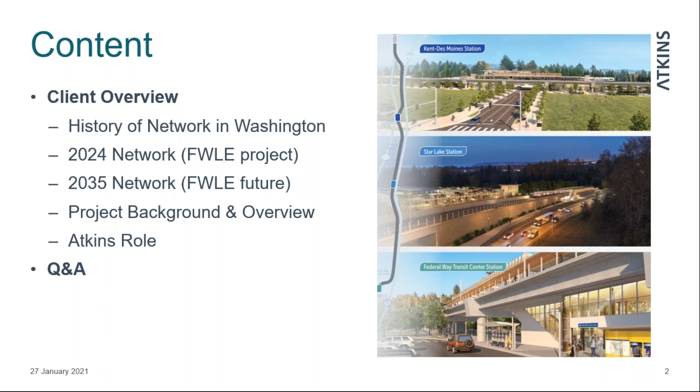In 2024, the new network is going to be updated, and in 2035 I'll take you through what the future of the network is going to be here in the Pacific Northwest. I'll run through the background and overview and what I've been involved in on the Federal Way project itself, and then it's probably best to do questions after.

So the client - I'm based in Seattle. Here's a map of the area, let's just do this.

Typical weather is exactly the same as it is in England. It rains a lot - we're next to the coast, it's all what it says. If you've ever seen Sleepless in Seattle, it's exactly like that. So if you don't like the rain, don't come to Washington.

In 1993, the local authority at Washington got together to create what they called the King County Metro system, and thought that they needed to overcome the problems of traffic and the amount of cars, because Americans love their cars and the cars are huge. So they got together and put together a plan.

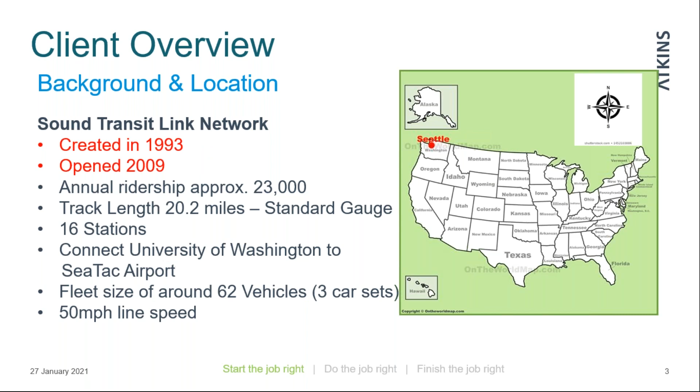It was created in 1993 by King County and Snohomish Regional Rapid Transport System to deliver a system that could run, opened in 2009. The annual ridership is typically 23,000. I'd just like to point out there are two famous things in Seattle - the Seahawks, famous for American football, and the Space Needle.

So whenever you come to Seattle, those are the two main drivers. It was for that reason they wanted to get the network system working here, so people could connect to Washington more easily without the need for traveling by car.

So they produced the new train system - about 62 fleet vehicles running, trying to remove the associated traffic impact.

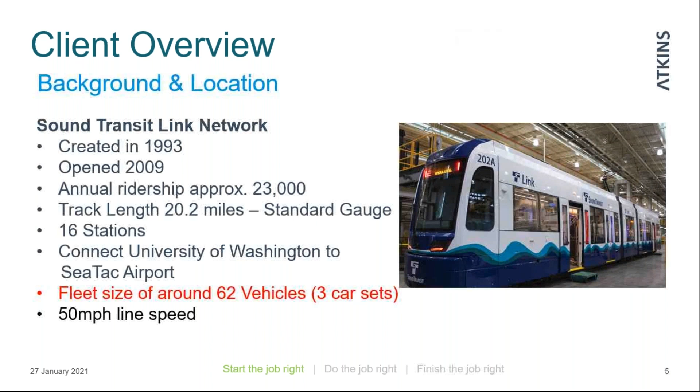The speed of the trains is 50 miles an hour, and this principally only ran from Seattle. It went north up towards the northern sector, and down south heading towards Tacoma, on the coastal line. So it was basically only a north-south ride, but it was interoperable.

It was built on the same gauge as the national railway. It operates a weekly service along the two corridors that radiate outwards from King County.

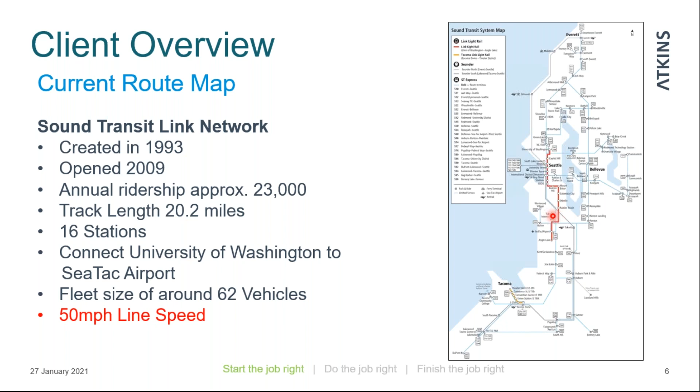With the expansion in November 2008, they realised that this wasn't enough, so the voters approved additional local funding for a new 15-year construction program of the light rail network in Washington. And in November 2016, Sound Transit approved a $54 billion plan to improve and expand the mass network in the Seattle area.

You can see the expansion, proposed expansion from what it was, going out east-west and north-south extensions. By 2024, Sound Transit will more than double its system, with about 37.7 miles of new track coming online over the next 4 years.

This track is a sort of metro system, so it's on slab track, or some of it is ballasted depending on whether it's at grade. But it's all new structures, all new stations coming online. The listed projects are currently in construction here.

We've got the Northgate Extension, which takes us up this way. We've got the Tacoma Extension, which is down to the south. Then you've got the Lynnwood Link, which takes us over to the side. So a lot going on. The one I'm particularly driving as the engineering manager is the Federal Way Extension, which is this section here, taking us down from where there's no existing track at Angle Lake through to Federal Way.

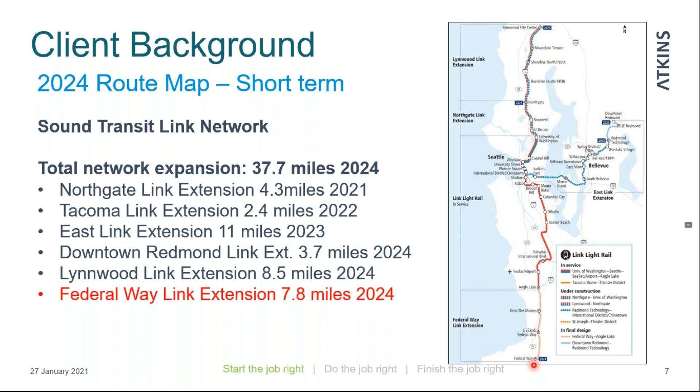COVID may have a say in that, because some of the projects are struggling with budget. Having to comply with COVID-19 rules and trying to construct with people working closely is causing additional costs, so there is a restraint. Also, the challenge is the restrictions on travel. The forecast planning ahead didn't take into account COVID-19, so there is less ridership taking place because more people are working from home. The projects up until 2024 are still being delivered, but the future expansion here may be susceptible to change - and I dare say that's the same in all parts of the world.

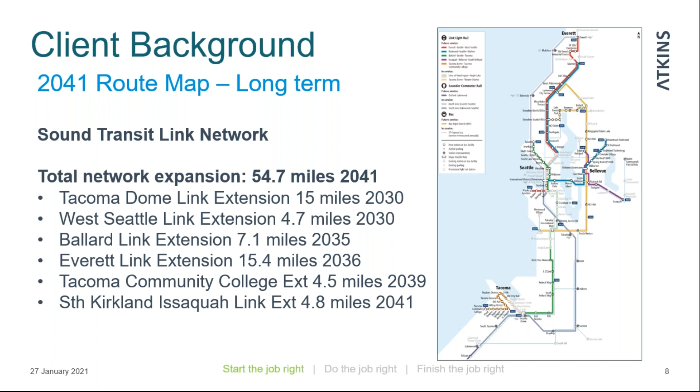A bit closer look at the project itself. We're going down from where it terminates at the moment, Angle Lake, and it goes all the way down to Federal Way - you can see it's 7.8 miles long, with 3 main elevated stations throughout. It's the largest design build project that Sound Transit have produced, and the project was approved back in November 2016.

It's an extension of the light rail that will take us down and connect Federal Way as a future hub, and then up into Seattle. It's a turnkey project, so it's a design build - the first time they've delivered a design build contract. The contract sum was about 1.3 billion. What they want to do is put all the onus back onto a single contractor, and we, as Atkins, are helping them manage that interface between the contractor and the client - informing the client, enabling them to create the appropriate specifications, and enabling the contract to be delivered, managing the interface and the budget for the client.

We proceeded back in March 2020, and it's due to be completed mid 2024. We are on track at the moment, even though it's been a very challenging time last year, which continues this year. But let's keep it on track, hopefully.

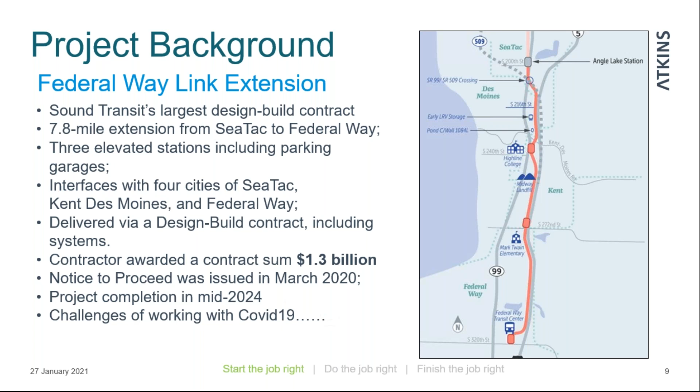So the Atkins role on the joint venture - we are with MOTS, so Atkins and MOTS are put together. It's a kind of oversight role that I'm involved in, as the engineering manager, as part of the team. It's acting as a client and making sure the design, construction and quality assurance is completed so that they can deliver and operate the railway safely when we hand it back. We have local subcontractors, but the principal contractor on this job is Kiewit, who's fully familiar with the design build contract, and we're working well with them - we've got a good relationship building.

So between MOTS, SNC Lavalin and Sound Transit, we're helping to deliver the design build. Phase 1 of the project was the award, which was back in 2019, and now we're into phase 2, which is the design and construction elements. Just to give you a flavour of the people on the team and the way it's built...

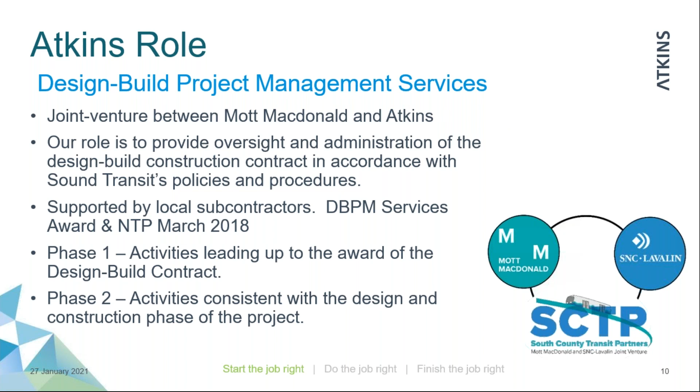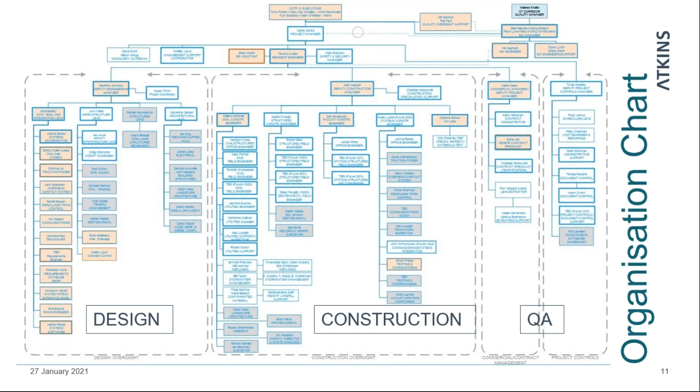I was going to show you a video, but I think I was a bit concerned when we did a trial that the broadband may not survive. So I've taken some snapshots of the oversight, the aerial view of the route.

There are some complications, but it starts in the north, Angle Lake, which exists currently, and we're connecting into Angle Lake, doing an elevated construction that has to take into account the future proposed 509 main link road. So we're integrating that, which is going to be built after Angle Lake is built and after the main construction through route of the 7.8 miles is built. So it has to take due cognizance of this proposed road.

So we're dealing with the agency WSDOT, Washington State Department, and we have many third parties that we have to interface with to make sure that we're not disrupting, and it's all working as a system, transport system.

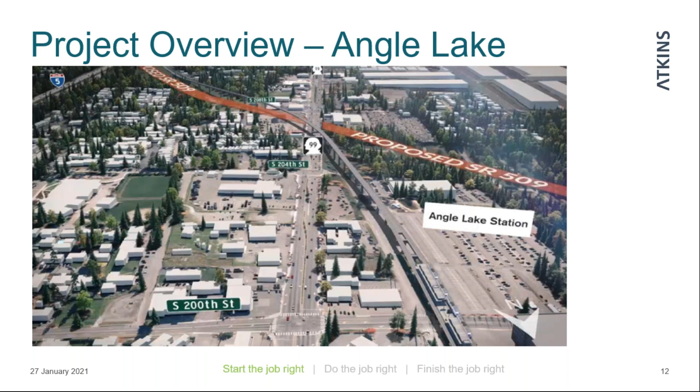I'll take you through a few slides which will run us through the overview of the project. As we come further south of the 509, you'll see that the route alignment takes a parallel running with the adjacent I5 motorway, so that's equivalent to the M4. There are various structures we have to build, and we've got the underbridge here, 216th, which is kind of 200-foot long, so it could be deemed a tunnel. I've got some more detail on that.

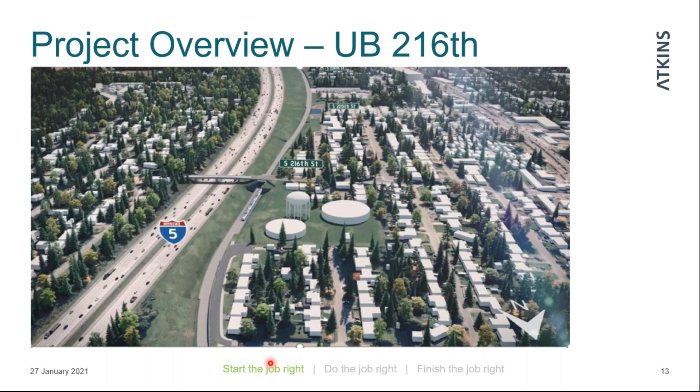That then runs parallel as we go down to the first station, and we come down to what is Kent Des Moines station. This is where it's not only a route alignment project, it's also a redevelopment project, redeveloping the area all around the stations where they considered it to be run down, taking it as a regeneration project. So that's why we've got not only the highway authorities involved, but we've also got what we call the AHJs, authorities having jurisdiction, and Kent Des Moines is one.

That's like probably boroughs, it's a Swindon borough. And then we go through. So there are many different types of interfaces that we have to keep through.

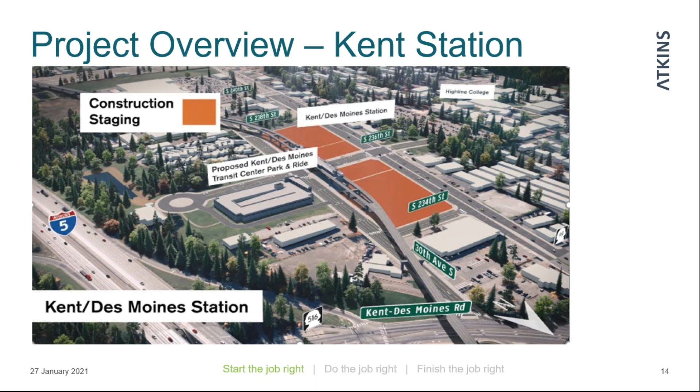On a more technical level, we've got challenges where we're running further down the alignment, following the I5 corridor. We have Midway Landfill, which is a historic landfill site, so it's got leachates, and we do not want to break the liner through there. So we've had a lot of interface on how to design through there safely and make a cutting.

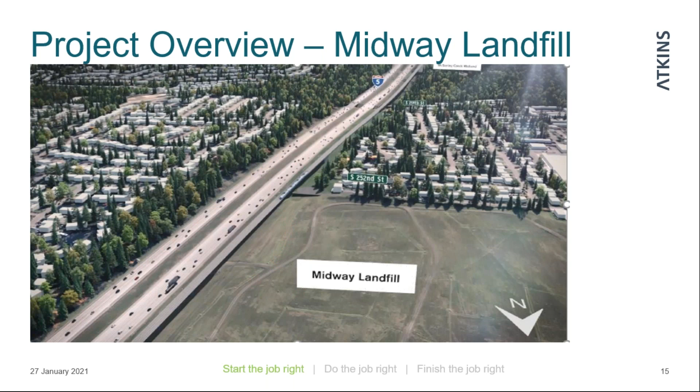So that we don't have future problems from an environmental aspect. Also in the northwest here, in Seattle area, we've got a lot of wetlands. As I mentioned earlier, it rains a lot here, and it's quite low lying down by the coast, so we have a lot of natural wetlands that are permanently saturated. We have to build structures to accommodate that sort of saturated land and get over the geotechnical problems.

So that we don't have a potential problem with settlement. Additional to that, we've also got the challenges of liquefaction of the subsoil, because this area is susceptible to earthquakes, and everything that we build has to be constructed to earthquake guidelines for this particular area. So that's another consideration into the design.

As we move further south, we get to Star Lake Station. This is a new station and a new area that's being redeveloped with car parking. So every station hub is going to have a large car park. They call it a garage over here, but it's a car park in principle.

And the route alignments into it from the road have to be designed, and the landscaping has to be completed to the northwest architectural requirements, and therefore everyone has a say. So it's making it quite slow progress in design, but we want to get everyone approved, because we can't start construction unless we have WSDOT, the authorities, the client, and the contractor all aligned with the agreement.

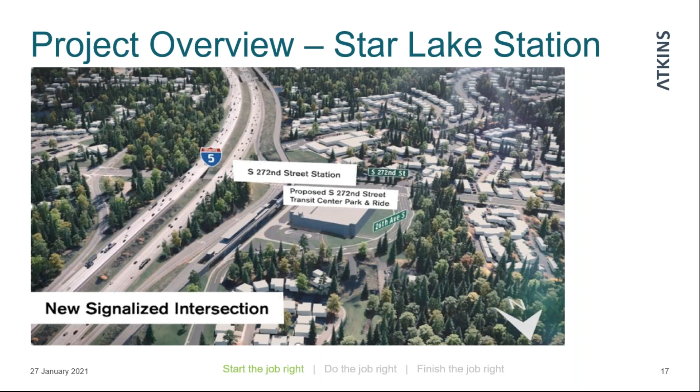Moving further south then to the end of the alignment, about 8 miles further down, we're redeveloping the whole area of Federal Way. A lot of that land has been purchased quite a few years out, and it's coming in here. You'll see the alignment comes around to Federal Way. It's on an elevated structure, and it finishes at the Federal Way terminal.

This then becomes the starting point for the future extension. So we've had to build that alignment to cater for 2 speeds. It comes in at 5 miles an hour to stopping, and then it's going to be a through route connecting further southwest to Tacoma, where it will come through at 50 miles an hour. The idea was to design it such that we could have 0 elevation, and then the plinths could be shimmed so that they could be taken out, and the permanent elevation would be the through route.

That's some of the challenges we were coming across. But that's an overview of the route, to give you a heads up. Looking a bit more detail then as we go through the disciplines.

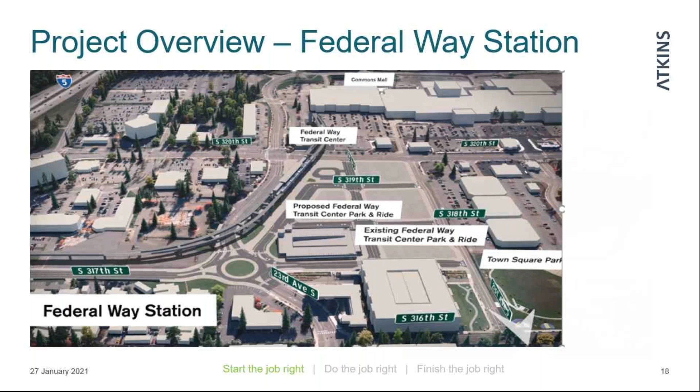In terms of track, and I suppose this is what you guys are probably more associated with, the majority of it is going to be on elevated track with concrete plinths and appropriate barriers. Standard spacing on these base plates will be 760mm, which is typical for a Pandrol or E-clip style fastening. We're not over-egging the spacing arrangement.

The at-grade track would be ballasted on what they call concrete ties here, but they're very similar to the concrete sleepers you have in the UK and Europe. Gauge is 1435mm. The rail inclination is slightly different, it's 1 in 40. The rail type profile is 115RE, slightly bigger than 113A or 113lb rail. It uses E-clips, but it can be interchangeable with Pandrols. In essence, it's very similar to European track on this metro system.

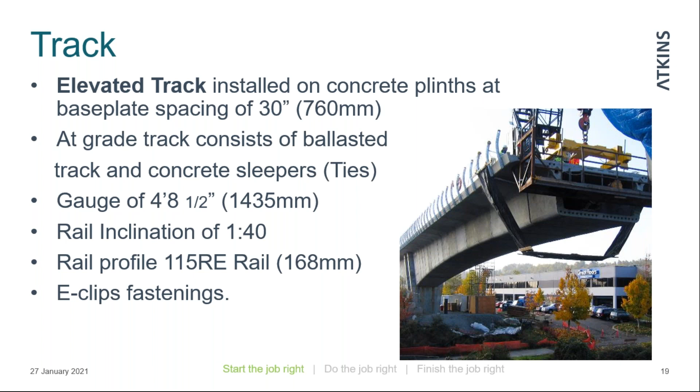Now, I mentioned earlier some of the problems we were having, with the landfill site and the interface with the I-5 on the left. If you look here, I've got a cross section where we've got the I-5 motorway running down this side. So the drainage is being taken away here from the I-5, but also we've got the landfill site. I've blown up this section, and you can see we've got the landfill all through here, so we're building a retaining structure to hold that back, and then a liner to stop any leaching.

We need to stop anything bad from the landfill site getting into the watercourse, and design it so we can take the water away from there and drain it away. So there's a large drainage system package here really for how do we deal with one problem on the right hand side, where we've got no way to get the water away to the motorway. It's a combination of solutions and then hydraulic modelling to prove that the design would work and allow no future ponding of water in this area.

So that's been quite a challenge, and also the treatment underneath. If the track alignment is here, we've got variable sub-base materials, so it's about treating that to make sure we had the appropriate bearing capacity for the actual land itself.

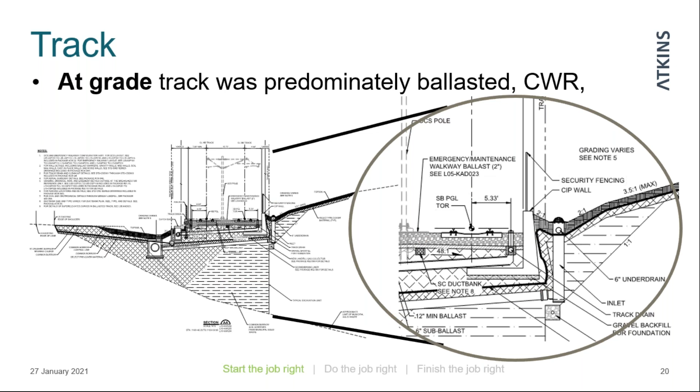The typical track only has 12 S&C units, so there's not a lot of crossing of the tracks. It's basically a metro system for getting from one station to another, stopping at all stations. The only areas where you'll have crossovers are to allow for operational movements, maybe maintenance at night or coming into sidings, so there are 12 S&C units added to this.

Typical design speed, as I said, was 50 mile an hour through route, and turnouts at 20 mile an hour into sidings. Everything's electric motor points, and it's fully welded track, CWR.

So track is one element of it, which seems to be everything standard componentry. If you're pulling it in new, you put it in on the straights, you won't put it in on curves or high canted track, you won't have tight radiuses. So we've had the freedom to produce, or review, the alignment to make sure that it's maintainable and they're not having future problems.

We've also integrated into it a rail grinding strategy that needs to be delivered, or rail polishing, so that the contractor has to meet after he's installed it to make sure that we keep the profile of the rail, both the switches and crossings and the plain line, in good order.

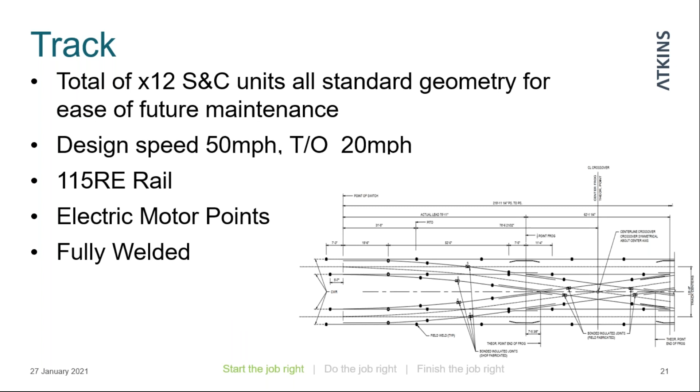Now, I mentioned earlier we had the challenges with the civils and structures, which was the tunnel alignment and the future road that we had to take into account. It was the seismic problem where they put an interlocking sort of box through the underbridge there first, but couldn't prove that under seismic conditions it wouldn't disengage.

And so what they've come up with is a cast in place unit. Well, it's cast, and then it will be walked in or wheeled into place, so it's a complete unit. It's important that the geotechnical information they had was accurate enough so that this was a very rigid structure, that it wouldn't crack under installation.

So the biggest problem was proving that we had the rigidity in the box in its weakest state when it's being installed, and that settlement afterwards would be comparable. I think we're trying to put it in within about 50mm tolerance over the whole length, and if we're outside of that tolerance, then we could have trouble with the box itself cracking.

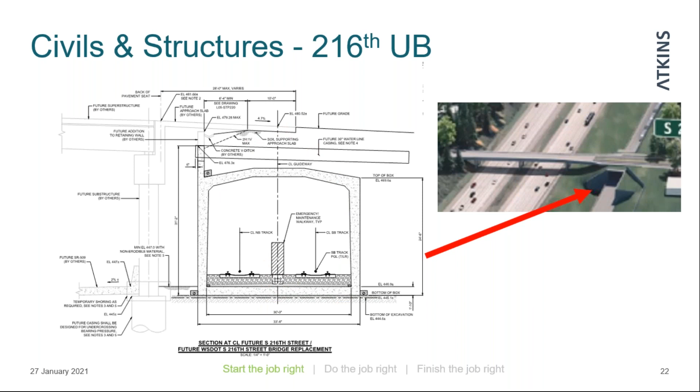Similarly, we've got the typical layout element of the columns. There are thousands of these columns going in along the route, all being constructed on site, predominantly through the elevated structure.

There's a real concern over the thermal performance and monitoring. So there's a thermal control plan in place, and you can see the sensors. When they're pouring and casting the concrete, they monitor the thermal temperature internally and externally, because high winds and high rain can affect the rapid cooling of the concrete. We have to make sure the curing plan doesn't give a thermal shock to the concrete, which would make the column weak, fractured and obsolete.

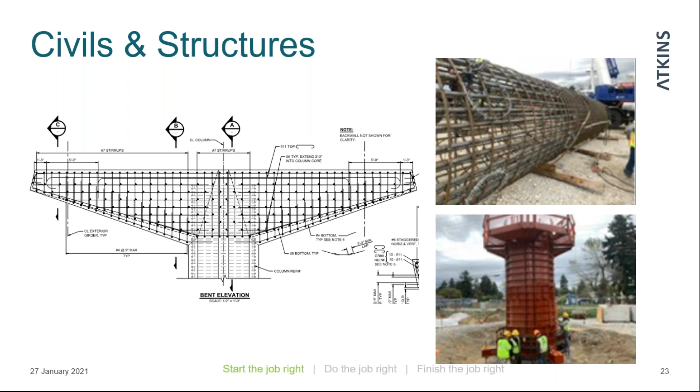But we've got it down to a rolling program, like a factory line: piling, getting the settlement right, getting the shuttering position correct. In parallel they get the casing corrected, using reusable shutters. Then they pour the concrete, cure it, and move on. This rolling program keeps going until they can remove the shuttering after the dedicated time allocated in the thermal plan, giving confidence that the concrete is safe and sound.

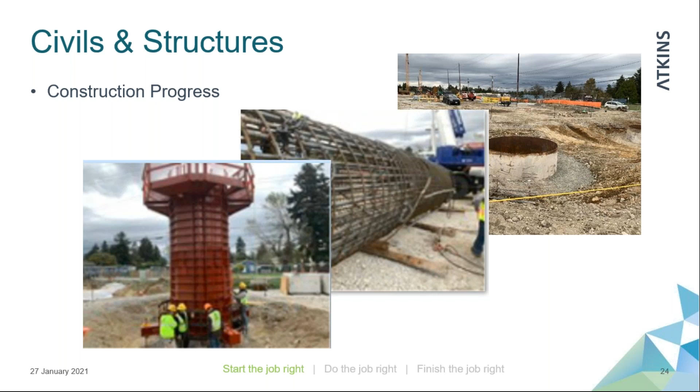With regards to civils and structures, I can give you a quick flash update. The design is about 85% complete. In terms of construction, the design from the civils is 85% complete. Some of the structures in the stations and garages are further down the line, but they are progressing.

We work under a similar GRIP process to what you used to have in the UK. I don't know with Brexit whether that process is changing, but we work off a 30% design, a 60% design, then what we call a 90% design, and then the IFC, or 100%. So there's a staged approach the designer has to go through, and as the design matures it gets more complex and detailed until you reach approved-for-construction drawings.

In terms of the challenges, on the base contract we're about 25% complete. Demolition, a lot of the felling of trees has been done, clearing and grubbing. Big challenges on relocation, working with Puget Sound Energy on where they think their utilities are, and when you actually do trial holes there are a few things catching us out. But I think on every project I've worked on, utilities are a challenge.

There's the excavation embankments - this is the route alignment going in next to the I-5, where we're monitoring embankment stability while they're working, and also the times of day they can actually work, since heavy rainfall means they can't be excavating. The two complexities, as I mentioned, are the Midway landfill and liquefaction. We're constantly keeping an eye on these two things to make sure we don't have a safety hazard on site, and we have a full-time team reviewing quality checks for safety as part of the contract requirement.

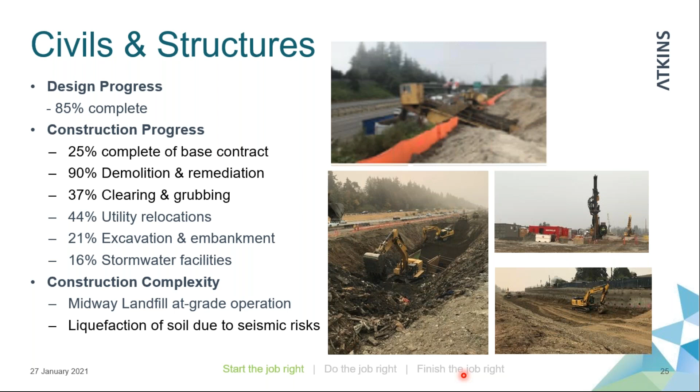Moving on to stations and garages, we've got 3 main stations - Kent Des Moines, Star Lake, and Federal Way - integrated over these 8 miles. So it's only every 2 miles or so that you'll have a station, because it's principally for people to use as a quick commuter route in and out of Seattle.

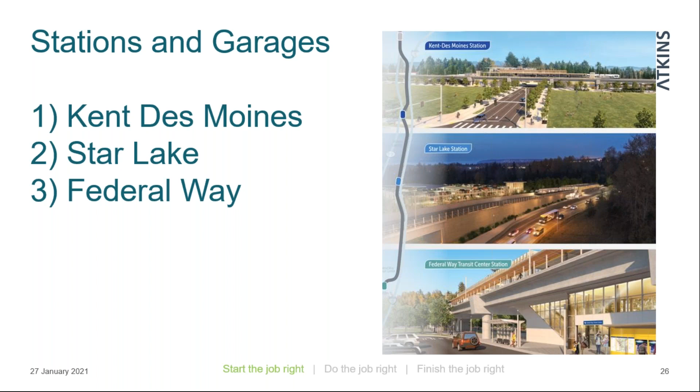There's a few challenges on that station - I think it was Star Lake, yes, Star Lake. We had a derailment risk. What happened was they put an elevator too close to the edge of the platform, and the ruling in the state of Washington is: if this train derails, what are the consequences? It was less than 3 feet, a very narrow entrance at the top end. We reviewed potentially going for a deviation to the contract by checking the rails and stopping the derailment, but the consequence of hitting it would take down the building, since it was a glass facade. So we had to widen out the structure and get allowance so that the designer had the clearances needed for Star Lake.

So there are a few challenges with certain stations. I'll just give you an overview.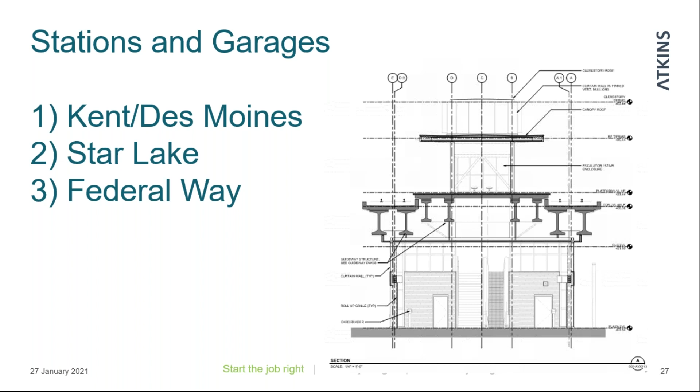Kent Des Moines, we've got Kent Des Moines station here. This is where the new parking's going and the route alignment comes through, but there's a lot of emphasis being placed by the authorities having jurisdiction that the landscaping is done to their specification. It also allows for about 500 car spaces here, and it's promoting easy access from the train station to the cars or to the open landscapes.

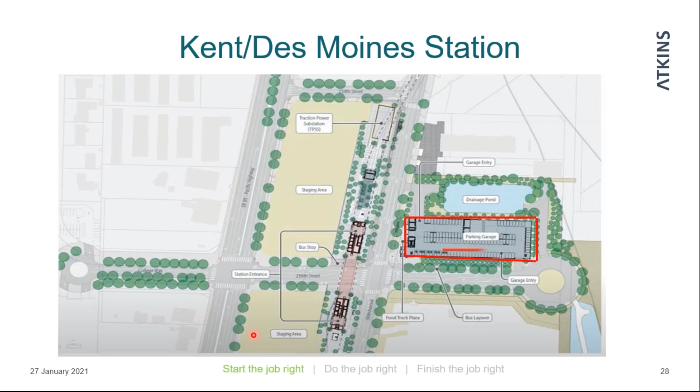And we're having two large plaza areas where it's open art. There's going to be open art here, and it's going to look nice. I'll show you a picture next of what it's visually going to look like. So this is the artist's impression showing the station, the roadway through there, and how they're going to landscape it. I think it's going to look quite smart when it's finished.

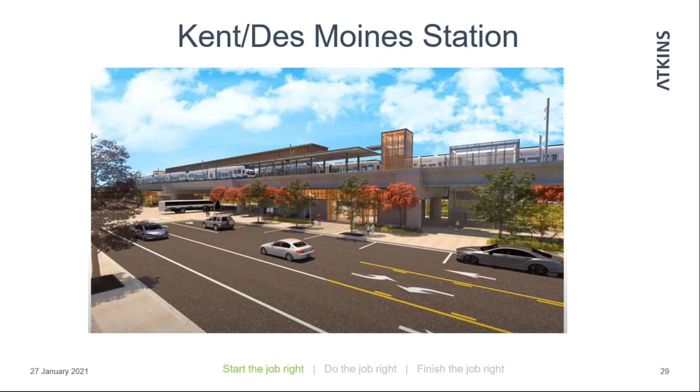Similarly, we've got the Star Lake station. That again is a similar layout where you've got the station line coming in, the large car parking area, and the planting with the lake beside it. This also has 500 car spaces, 3 new landscaping areas, and 2 plaza areas for seating and public use. So it's a similar footprint.

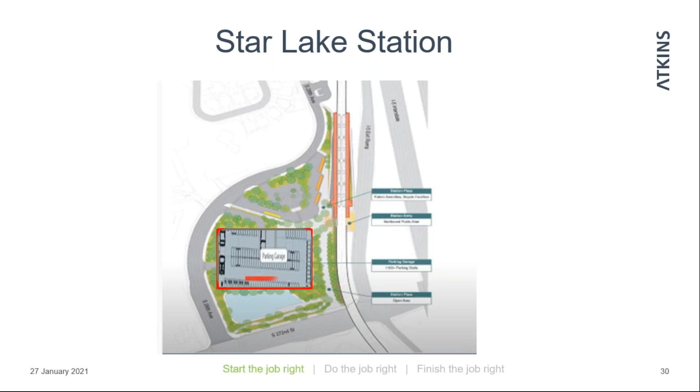And this is an artist's impression of what it would look like. So as you're walking from the bus through to get your tickets, and then the train station on top with the glass facade. Anywhere we've got a station or garage, we have to go through the Washington Energy Code, and every structure has to be approved to their energy code. So we don't want buildings that have potentially got cold spots. They're modeling this in a 3D environment to prove that they will work in the Washington state environment.

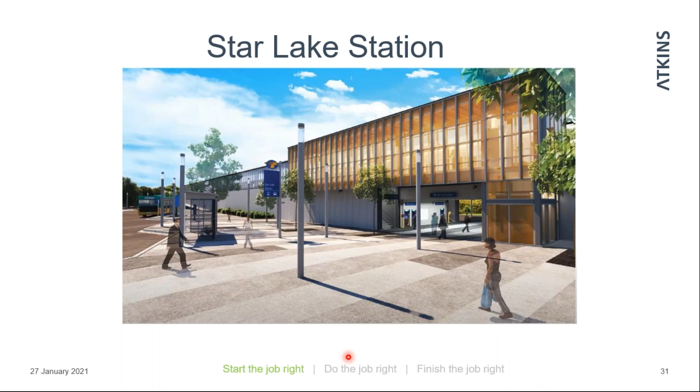The challenging one was the terminus station at Federal Way. This is still draft - we've nearly got a solution, but this is a complete redevelopment of the whole area, not just the station. There's the station as it comes in, an extension of the existing garage or parking area, and the road structure around here is being remodeled as well as part of the project.

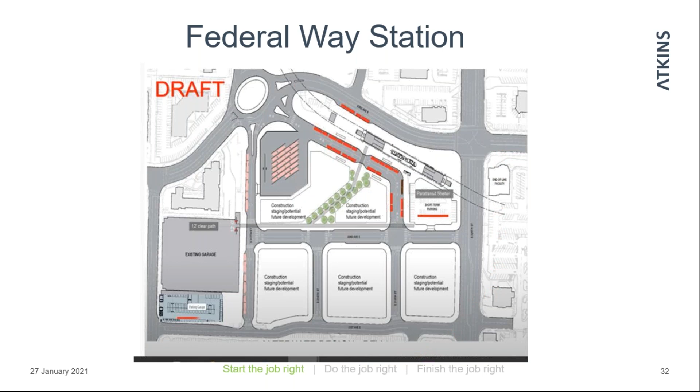This is an artist's impression of what it would look like. So you'd be parking out the front, you have an elevated Federal Way station, and shops and interfaces underneath. So that's around 500 new car parking spaces again, new street access, biking, and 2 plaza areas - a similar footprint again. These are coming towards 90% of design, so we're at the detailed analysis and thermal modelling plan to prove they meet Washington state codes.

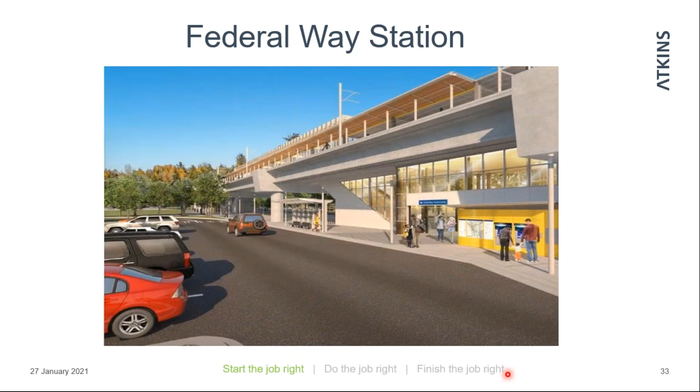So the frequency - what we term here as a headway - I think we're working on a 6-minute headway between trains. So it's a high frequency running service, not running fast, but running concurrently northbound and southbound. That analysis had to come up with, based on the route alignment, based on the speed, based on the construction - whether it was ballasted track or unballasted track, whether it was on a floating slab or on a treated mat - taken into account to give us a decibel frequency of noise.

And then we had to assess how far away the building or the impacted building was, and whether they would need mitigation along the route. So that was one quite large area which we finalised only a few weeks ago, to give us the noise wall construction heights verified along the route.

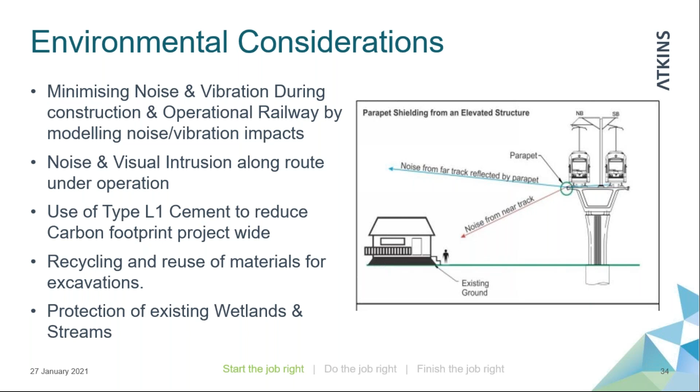So, noise, visual effects, construction, security, and traffic detours - all these had to be taken account of in the design process, as well as protecting the wetlands, the existing route, and existing infrastructure.

So the impact was deemed minimal, but the benefits of the project were seen as beneficial.

I think that's where I'll draw it to an end. Has anyone got any questions? They can, I don't know how to take them, but thank you very much.

I've enjoyed the 18 months so far, and I've got another 2 or 3 years to go to build this. And if I can get back to the UK, I'll try to, but at the moment I can't travel. So, but I'll say thanks.

Over to you guys. Thank you, Geoff. Thank you for this presentation.

I will ask the first question with regards to the design. Considering how complex this project is, I presume that the integration of all the disciplines is quite essential. Yes, I'll use this one.

I was wondering, from the point of view of the software that is used for track, which software is used there, and how this integration of the track with the other discipline is managed there.

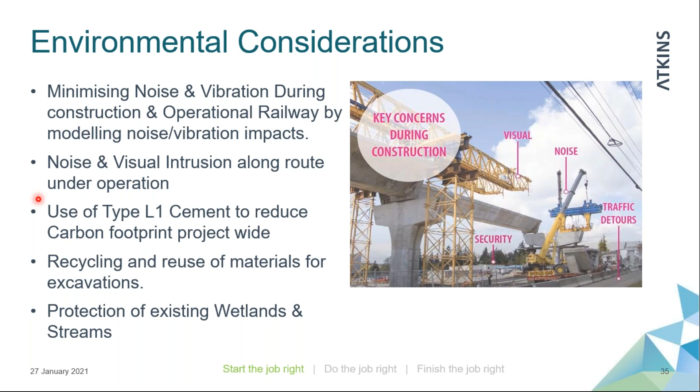What I mean by that is temporary construction rights, which are allowed to enable you to get construction done, but then these will be retracted back to the permanent line markers. So every parcel of land has an owner and a requirement that you have to manage, and all these areas are parceled off. There can't be one parcel of land affected without the owner knowing about what's to be done.

Matt Weber has a question.

Yeah, hi Geoff. It was just a question around the design for the seismic risk. Obviously you didn't really have to design for that over here. What does that comprise of? How does that work? What are the structures actually better able to do than they would be in the UK?

Well, I mean they've got to take the shift - what's happening here is if you've got material that's susceptible to liquefying, and they've found that, that will mean it loses all its stability. So you can't leave it and say right, I've got the foundation, but it's going to be in a potential soil that's going to liquefy - it's going to turn to liquid, say, for simple sake. We have to either bridge it, which is an expensive way to do it, or we treat the soil.